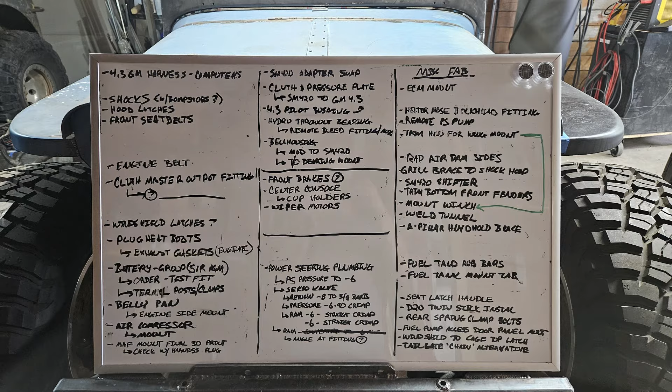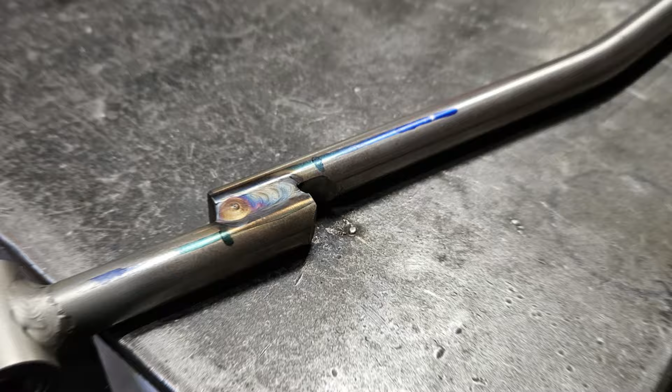Working on the all blue Willys again today, and just a few things, checking off the list. Big one today was making the shifter for the SM420. So we'd got the transfer case shifters for the Dana 20 modified yesterday, and so today we could go ahead and make that shifter.

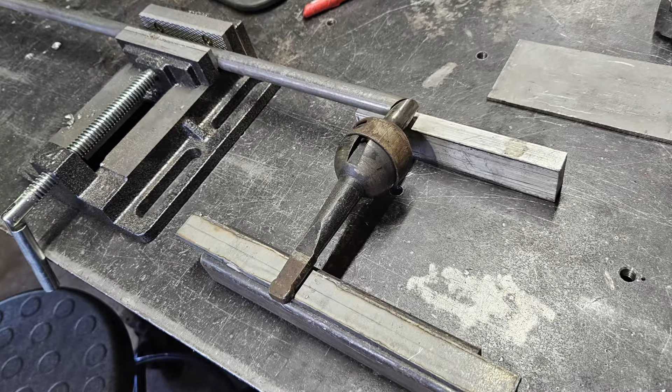It ended up being mostly from scratch, and I didn't use much of the original shifter beyond the shift ball and the pivot. That's just because on these flat fenders, especially ones with the belly pretty flat like this and a custom tunnel and everything raised up, there's just not a lot of room. The SM420s and the SM465s have the shifter pretty far forward in the case, and so that comes out generally right under the dash or right under the edge of the dash. So that's kind of a pain.

If you want to avoid that, a Dana 18 like I have in Rango or a late model aluminum top SM465 has the shifter moved to the rear. But anyways, we had an SM420 in this one, and so this is what we got. It turned out pretty clean and simple.

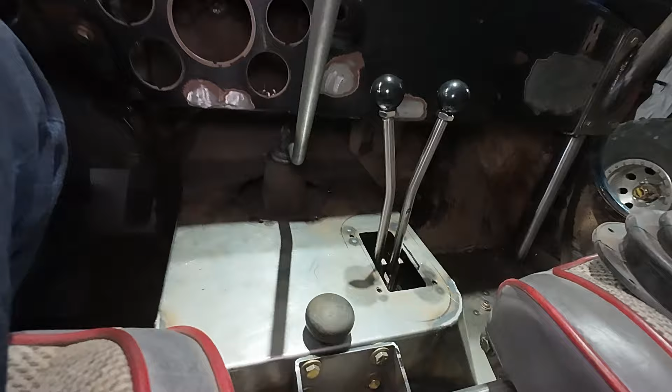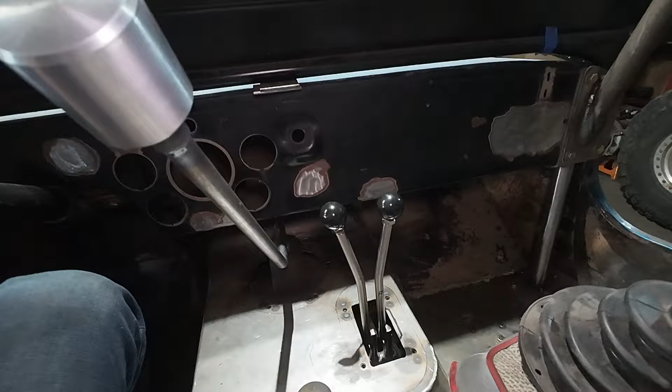I ended up making a whole new shift cane just from some bar stock. I cut off down under there and welded that to the stock shifter with a 90-degree corner. It just barely fits in there to take it in and out. And then I ended up making a custom shift knob for that. All pretty clean and simple.

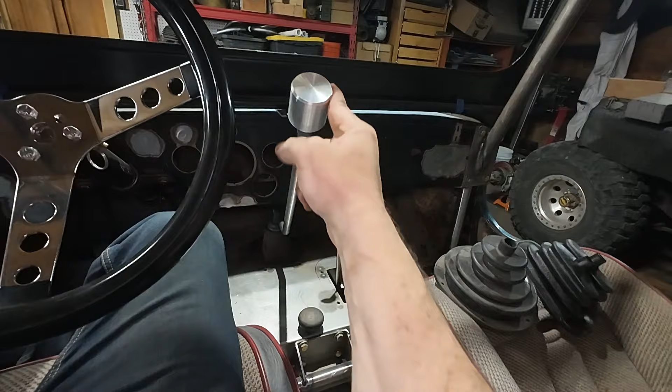The SM420, one of the things I don't personally like about it, some people do, is reverse is over and down towards you. So this is neutral, this is the 1-2 gate up and down, this is the 3-4 gate. And to get into reverse, you have to go over this way again, and so it always gets very close to the steering wheel. So you end up having to go pretty close to the steering wheel and down to split the difference.

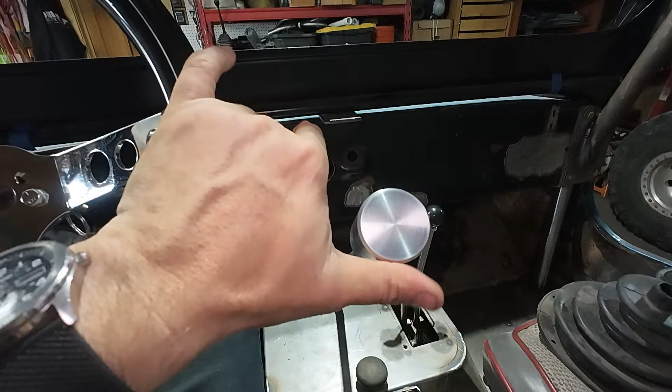And I couldn't really cheat it the other way on this one, because you can see how close the shifter gets to the transfer case in the 3-4 gate. So that's 3 and 4, and it just has enough room to be comfortable there. And then the normal 1-2 gate. Some people like having the reverse over and towards them. They think they can get it in a panic better or something.

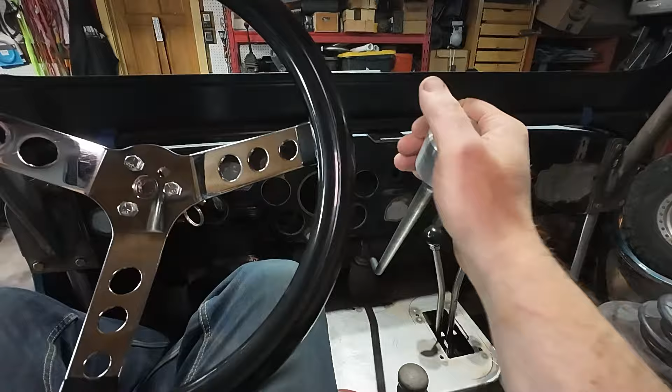But for me, I actually had an SM420 in Rango when I first built it, and I took it out and I put a T18 in it. That one has the traditional over and down reverse, and I will take that any day. But the SM420 does have a nice deep first gear. It's the longest adapter length, but that's what we had to work with in this, so not too bad, and a very comfortable shift position in general, kind of right off the wheel.

So you're driving, and then the shifter's just right there when you need to shift. This was the stock, original shift knob. These action cameras are not the best at focusing. It's seen better days, but I do like the cool pattern. So I want to see if I can replicate that with some stamps in this aluminum shift knob that I made, just in the top, to give it a little bit of a more finished look.

So I need to find my letter number set, and then I'll probably have to make some matching shifters for the transfer case now, but those aren't too bad. They're nice and small. And then this is a Dana 20, so it's actually a true twin stick.

This is the rear axle, this is the front axle, and this one hasn't been rebuilt yet, so it still has all the factory safeties and detents, so you have to shift the rear first and then the front, always with the twin stick. So anyways, all that, and you can see the angle for that. Everything now is a lot more even and clearanced.

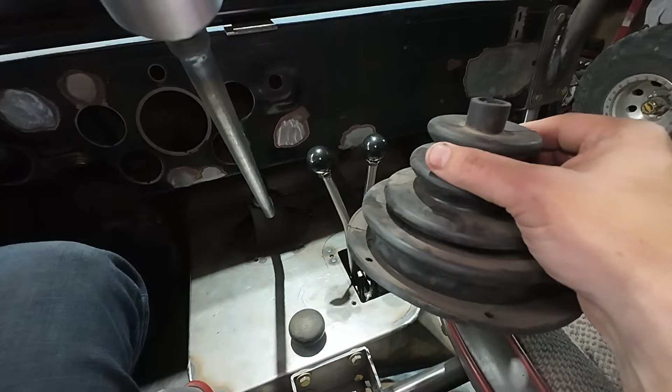This is the boot for the transmission. It does fit, it just requires some swearing to get on there. And then this is the boot for the transfer case. So that'll finish up the top of the tunnel pretty nice.

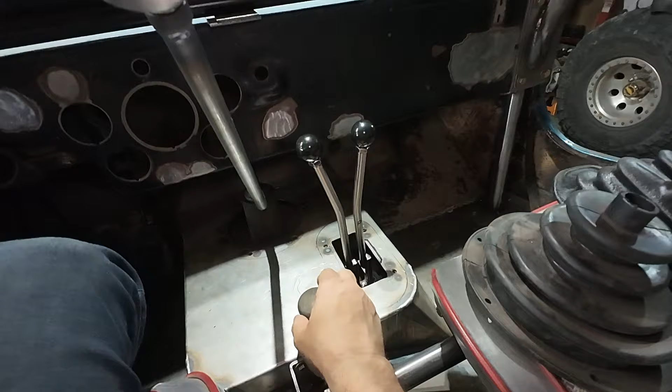And then I have this area here. I don't know. It's not really cup holder territory or anything, because, I mean, I guess you could put one right there. Your knee would be in the way, maybe. But I don't know. Something right there. It's a big spot on the tunnel that would be nice for something. Heck, you could even make a switch panel or a keyboard.

Anyways. Yeah, so that's the shifter. So now I can sit in here and make car noises and steering noises and pretend like I'm driving it. It's getting closer and closer every day. But that was the inside stuff.

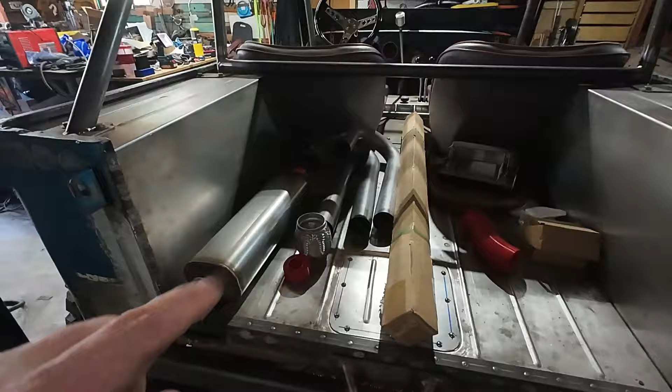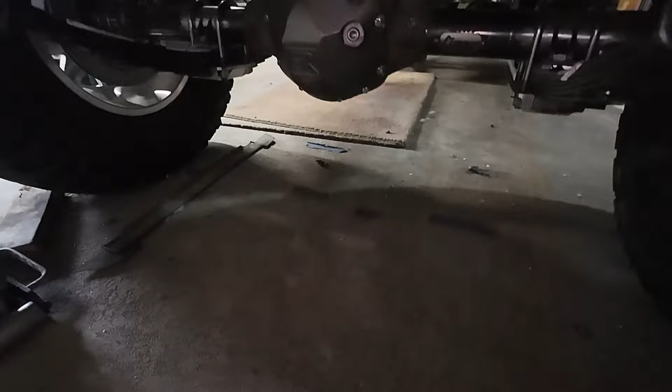And then the other one, this one might be a little challenging to show you guys, and I hit my head at least 5 or 6 times. There's all the rear exhaust parts, waiting on some more blocks to print so I can do some more layout. But anyways, that's not it. It's under here. So I had to do these.

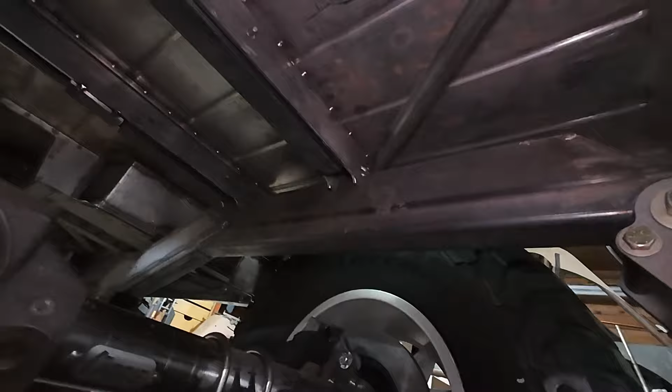I'm gonna have to get a pointer. Hold on. We gotta go on a field trip. Oh, no. I got it. Okay. Come under here. Let's go. Whoa. Okay. So, I think my light's dying, so I'm gonna try and hurry.

I put in these plastic rub guards, so these fit in these cross members. There's one here, there's one here over the top of where the fuel tank goes, and this is what the fuel tank is gonna be mounted up against. And then these are just pinned in with some 1/4 inch pins. I will probably get some with spring or clip retainers, but for now I just cut off some bar stock.

But anyways, those are both, if you can see that, both in there. And there's a short one here, and then I added this, which is going to be one of the mounts for the forward section of the fuel tank right there. So that'll get drilled, and then you'll be able to slip your fingers up in there and put the nut on it and stuff. But that's the underside.

Y'all. Ew. Are you guys getting motion sick yet? Okay. So now we get to go to the list. Whoa, sorry. Oh, all right.

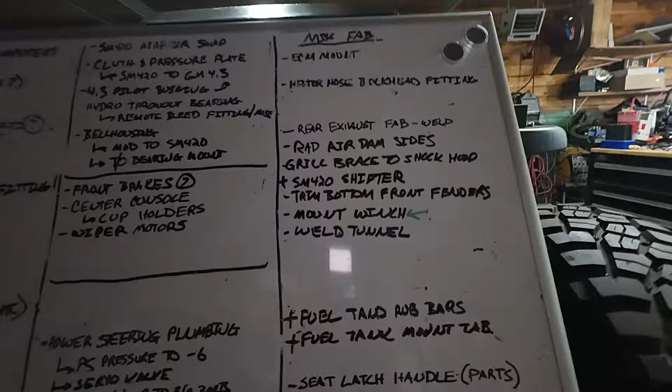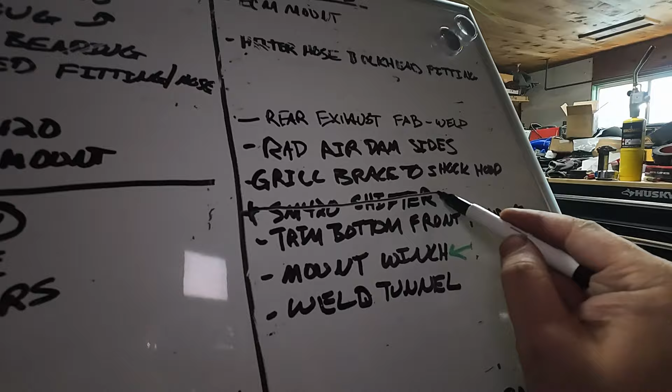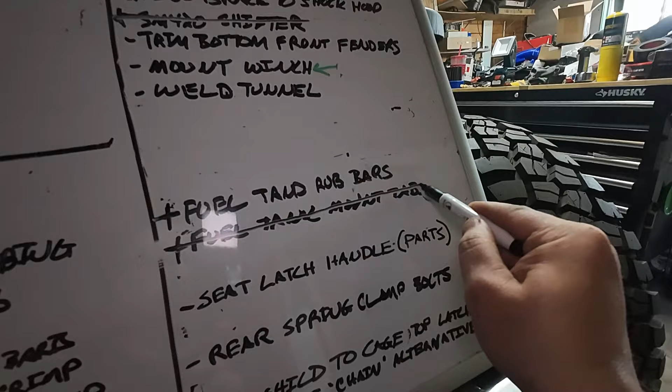So today we got to do the SM420 shifter. So that is getting crossed off the list. That's actually done, other than the letters in the shift knob. And then we did the fuel tank mounting tab, and then we did the fuel tank rub bars up in there. So not too bad at all for a morning in the shop.

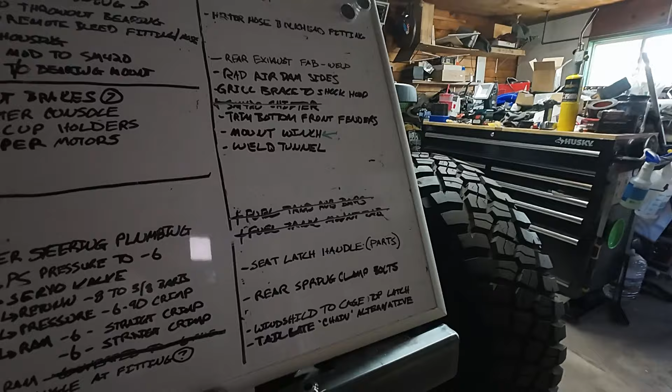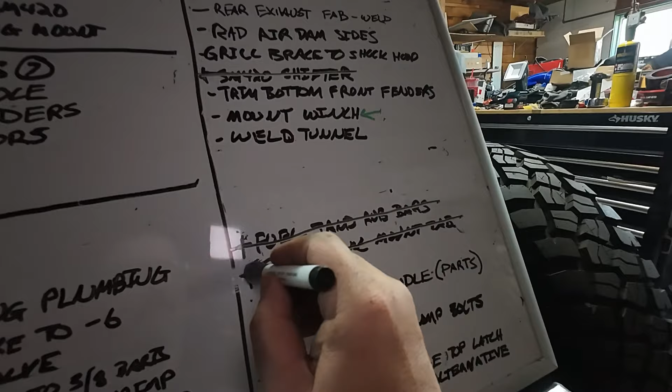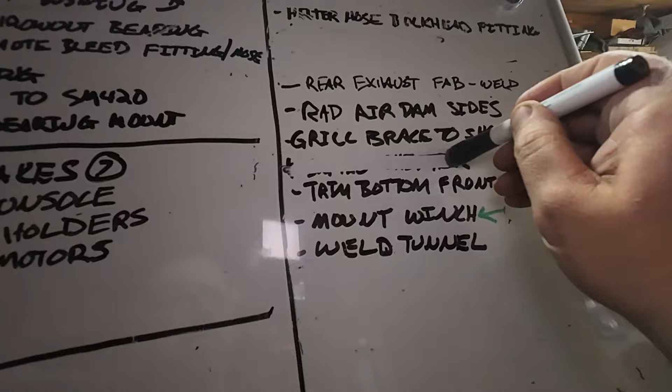And yeah, got to go run and get some parts and stuff, wait for the 3D printer to catch up, but get to cross these off the list. All right, pretty good progress, pretty good.